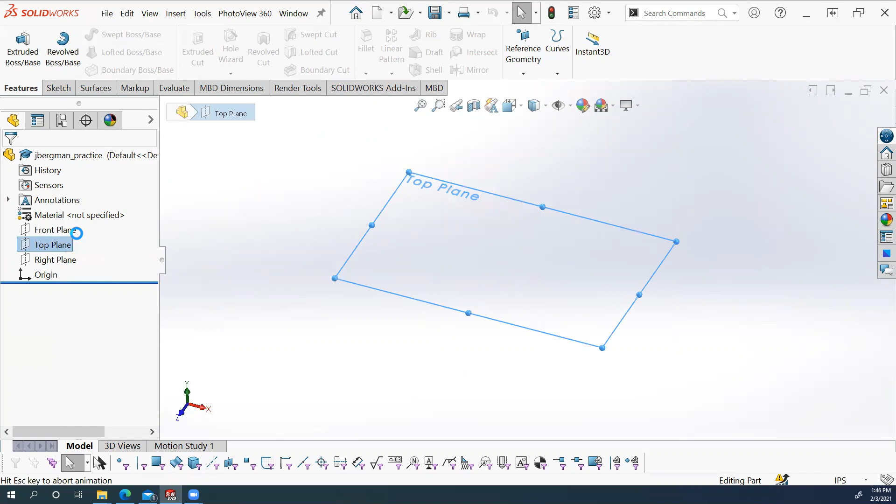So let's create our base sketch for our first profile. We're going to create a new sketch on the top plane. Click top plane, then sketch. And if your computer doesn't become normal to the top plane, you can hit Control-8 to bring your view in the graphics area to the normal view.

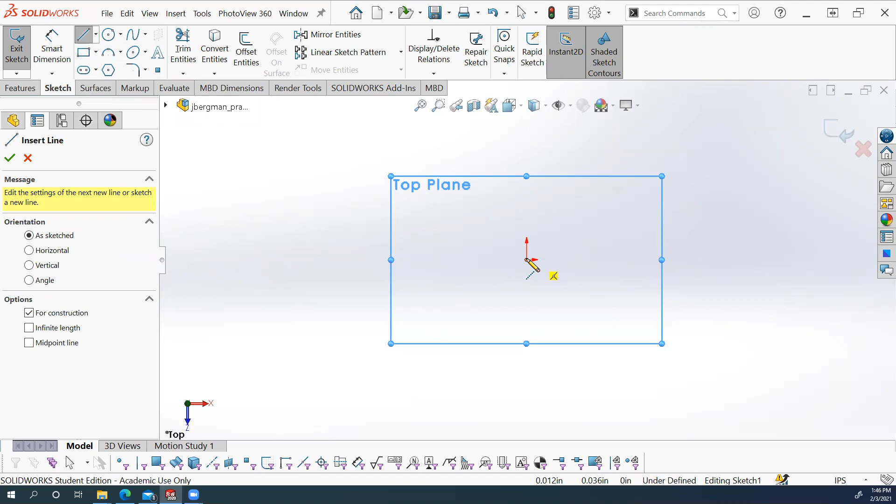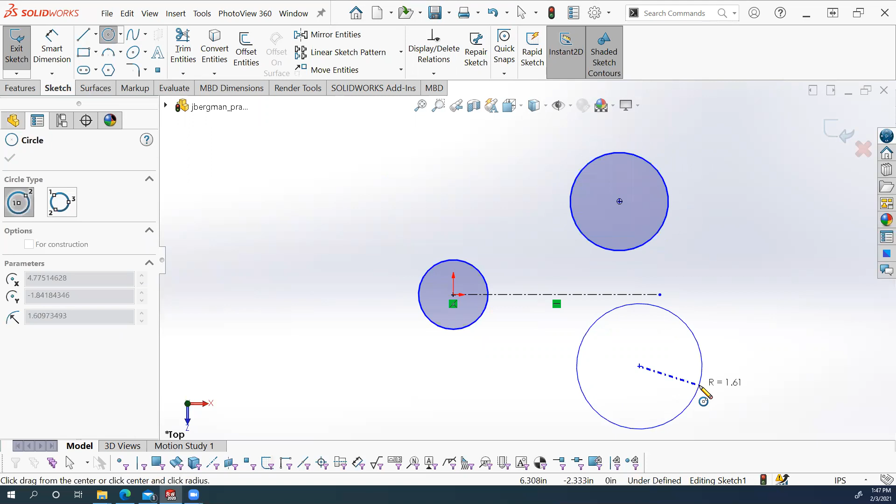Click out in the graphics area to deselect anything selected. Now I'm going to add equal relations between both sets of circles. Hold Control on your keyboard and click the 3 bigger circles and click equal, check. Then hold Control again and click the smaller circles and hit equal, check.

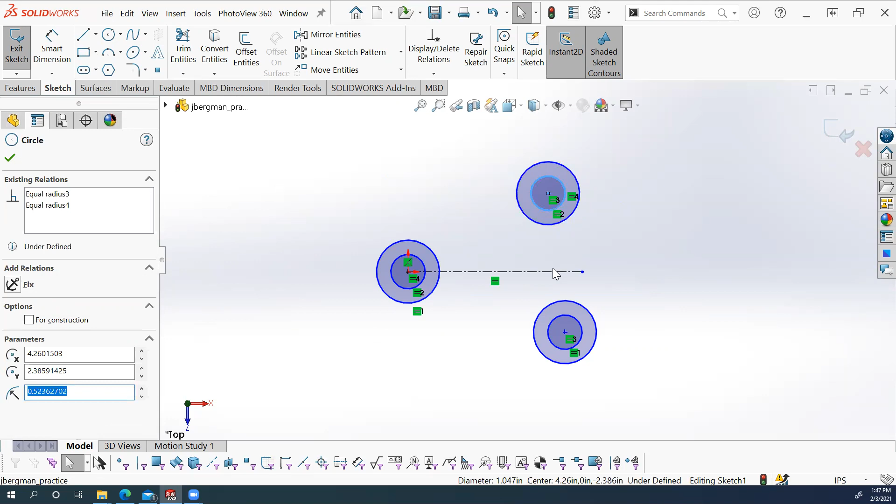Then I'm going to hold Control again and click this smaller circle, the center line, and the other smaller circle, and add a symmetric relation here, check mark. Then I'm going to hold Control one more time and click the end point of the center line and the center point of the circle, and add a vertical relation here. I notice there's also another center line I didn't add, so I'm going to click the arrow, click center line, and add that center line there.

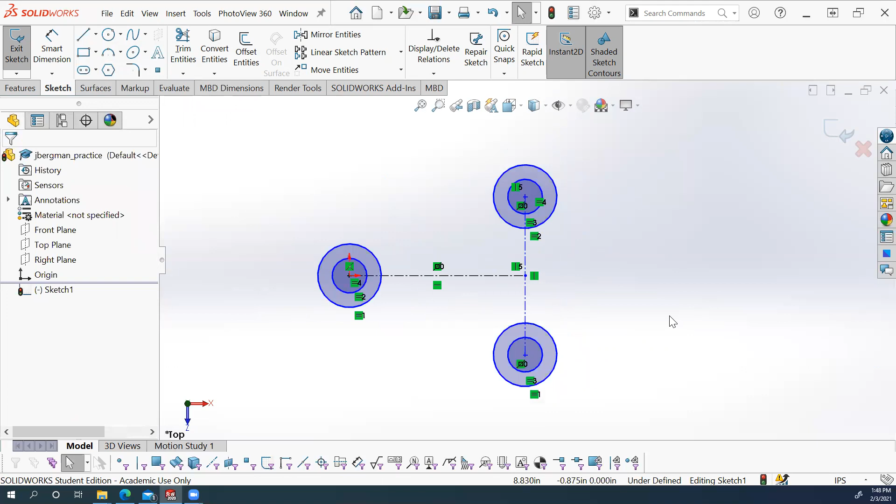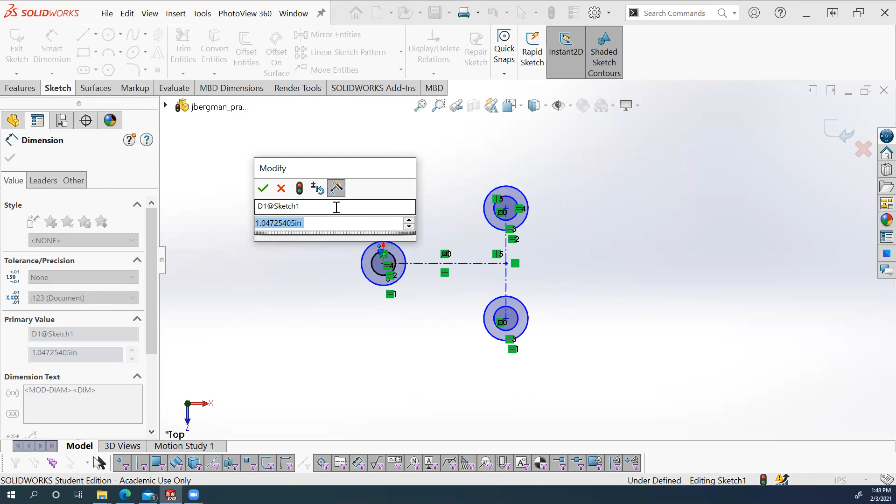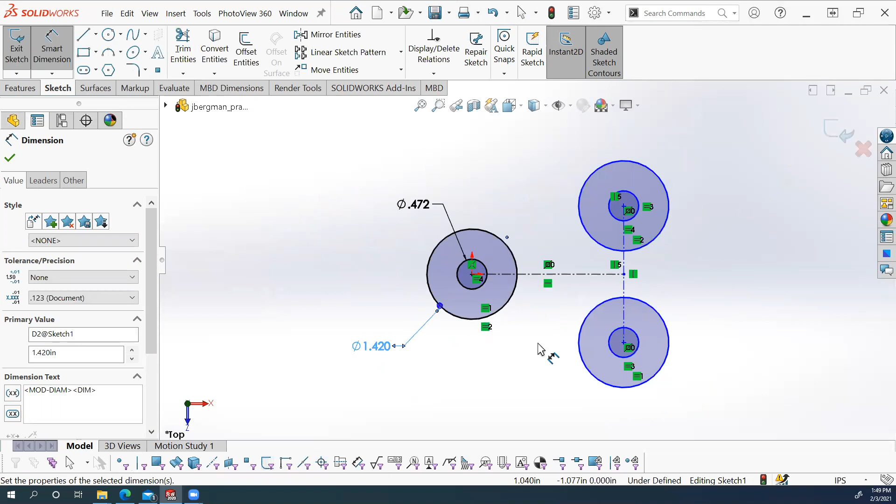Now I can go in and start adding dimensions. Click Smart Dimension. The smaller circle is going to have a diameter of 0.472, enter. The bigger circle is going to have a diameter of 1.42, enter, escape. Then we're going to add the distance from this center point to this center point, which is going to be 2, enter. And then the distance from this center point to this center point is going to be 2 as well, enter. You know you're doing everything right if you look in the status bar and see fully defined. If you don't, make sure you add all of these dimensions and relations to get fully defined. If yours says fully defined, you can move on to the next step.

So we're going to use a 3-point arc. The location of the arc is in the center here, and you click the down arrow and click 3-point arc. We're going to draw an arc - just click on the edge of this circle, then click on the edge of this circle, move your cursor in the downward direction and click. Then escape to deselect, and click in the graphics area.

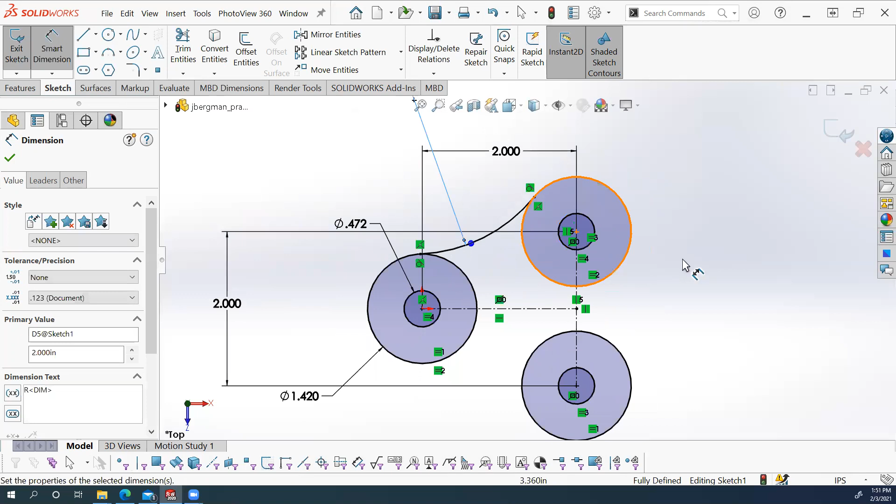Then we're going to add a tangent relation. Hold your Control button and click this arc and this circle, add the tangent relation there, check mark. Hold Control again and click this arc and this circle, add a tangent relation there, check. Then add a dimension - a radius of 2. Type in 2, enter. We're fully defined here, so we're good to move on.

Then the next step is to use the 3-point arc again. We are going to just click on this circle, click somewhere over here, then move your mouse down so the arc is in the downward direction.

Okay, and then click in your graphics area to deselect that arc. Now we're going to add a tangent relation. Hold control on your keyboard, click the arc and the circle, and select tangent, check mark.

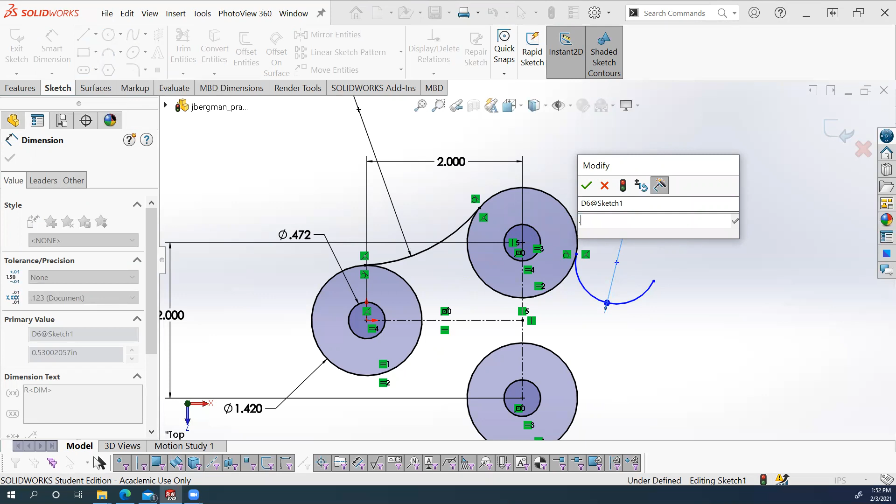Then we're going to add a smart dimension. Let's see here, 0.6, enter. Okay, awesome. And we're going to be able to fully define this once we draw this line here.

Actually we can do it now. Hold down control on your keyboard and click the endpoint of this arc and then the center point of the circle, and click vertical. Check.

Oh okay, I see here, it can move any direction up or down, so we still have to draw the line to define it.

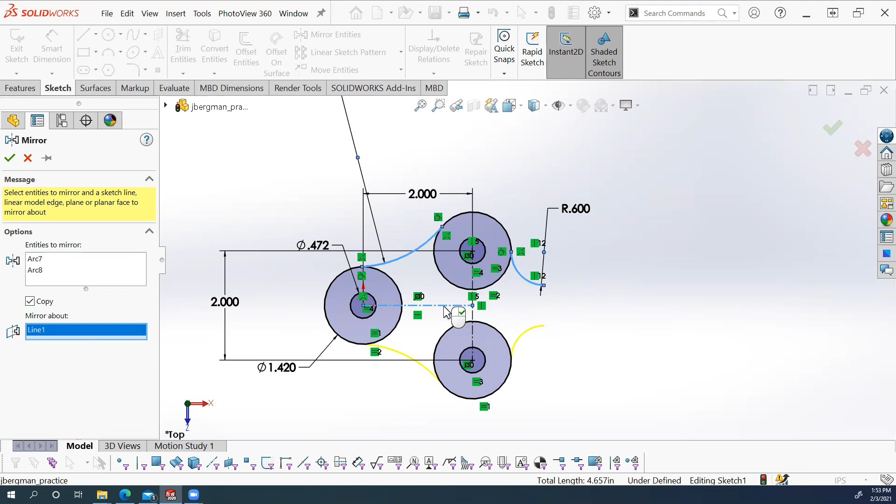The next step is to use the mirror entities command. Click mirror entities. The entities we want to mirror are this arc and this arc. Then we want to copy those about - click the mirror about section. We want to use this center line as the mirror about line. Then we're going to click check.

Then we're going to select the line command and connect the endpoints of these two arcs here. Escape, escape, and then click smart dimension. The dimension for this line is going to be 0.63, enter, escape. And that should fully define these arcs for you.

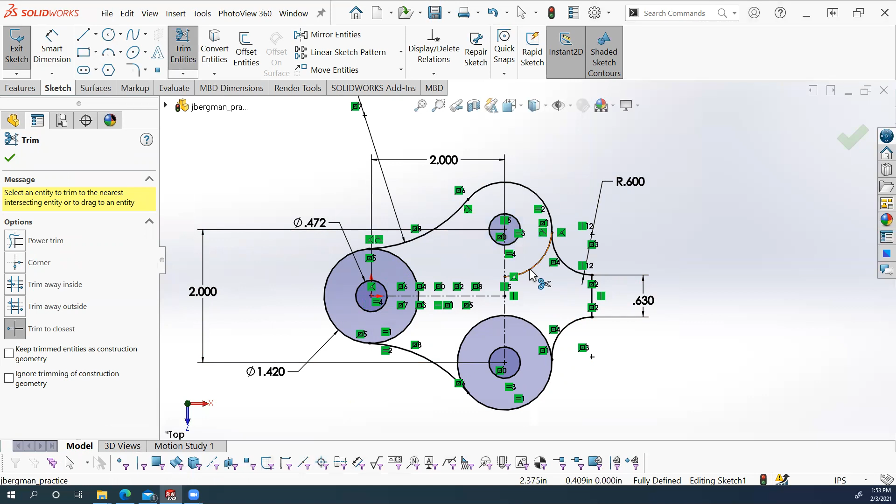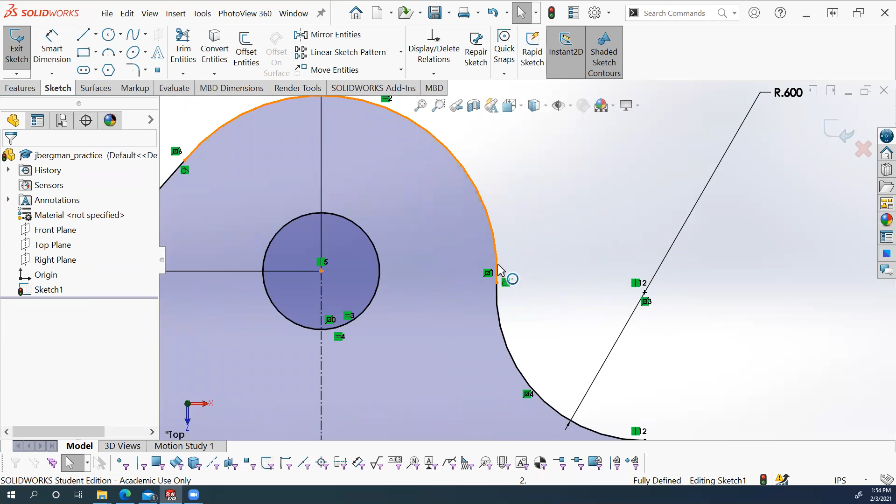Next, we're going to click trim entities, and we are going to trim the inside of these circles. If you did your trimming correctly, you should have a closed profile, and this should all be purple. If this is not purple for you, you might have some extra things you need to trim over here. Just zoom in to your sketch and see where there's openings or maybe a line that's hanging off that needs to be trimmed to make it closed.

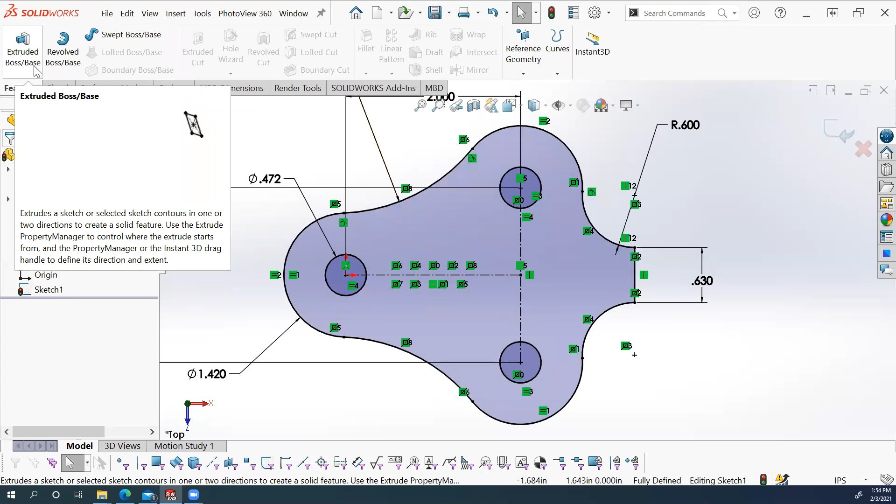All right, so now we are going to add a feature to this sketch. Click the Features tab. We're going to use Extruded Boss Base, and we're going to use the blind extrusion option.

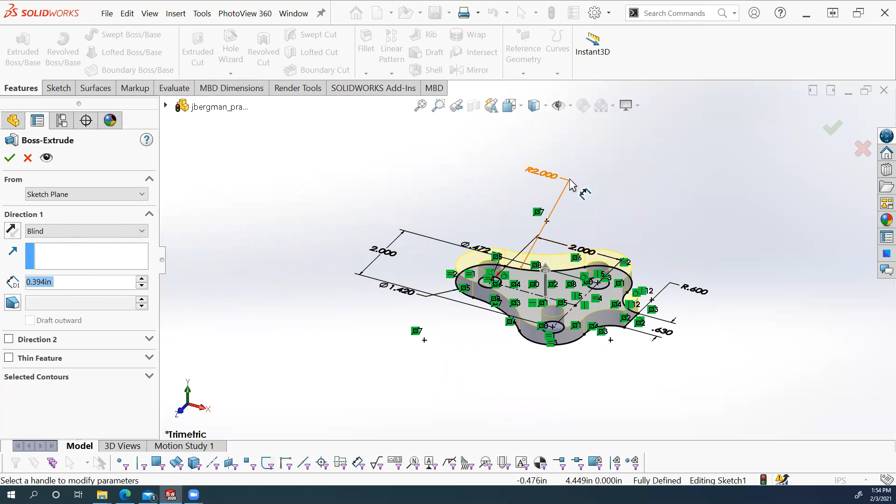And for our depth, I'm going to make the depth 0.394 inches, enter. And then make sure it's going in the upward direction. Then we're going to click check for OK.

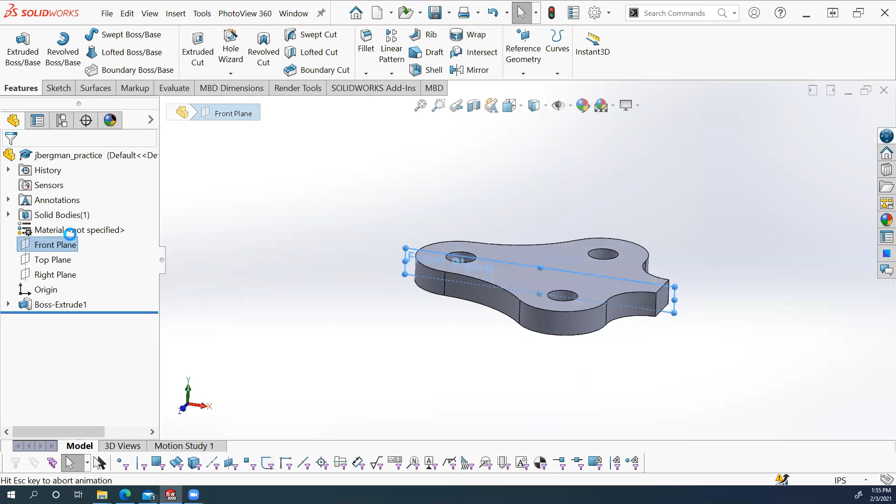Now we're going to do the second feature, or first create the base sketch for the second feature. So we're going to create a new sketch on the front plane. Click front plane and then click sketch. Then Control-8 on your keyboard if your display didn't become normal to the front plane.

All right, and then we're going to click the circle command. I'm just going to draw 2 circles just right here. Okay, then escape. All right, and now I need to make these construction circles.

So I'm just going to click on the circle, and there's 2 ways to do this. You can use this little pop-up menu and click construction geometry. If you click that, it becomes a construction circle. Or you can click this circle and then click for construction in the properties manager, check mark. That's the other way to make these construction circles.

Now we're going to add the tangent constraints or relations. Hold down Control on your keyboard and click this circle, and we want to be tangent to this face here. So we can click this line there and add the tangent relation. Check. And you can see, I'm going to rotate for you really quickly - you can see that it is actually tangent to the face here, not the line we selected.

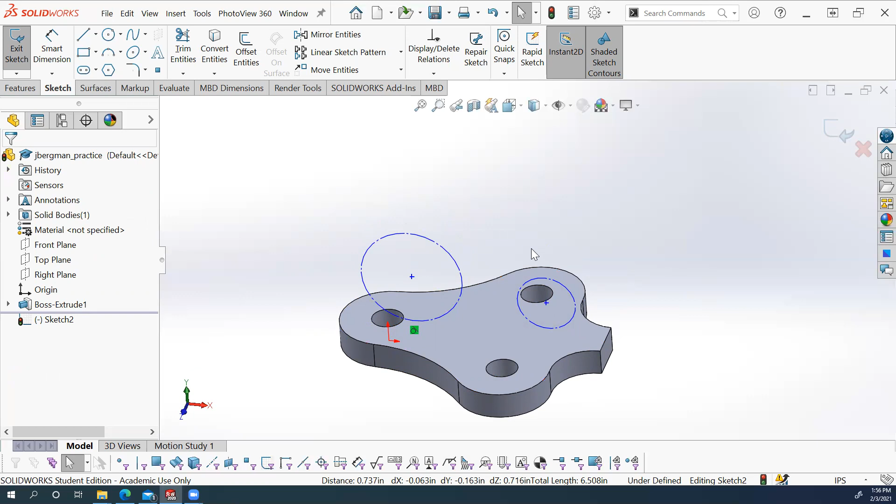Okay, then I'm going to hit Control-1 on my keyboard to make this the front view. All right, and then I'm going to hold Control again on the keyboard and click this circle, and then click this smaller circle and make these tangent as well. Check mark.

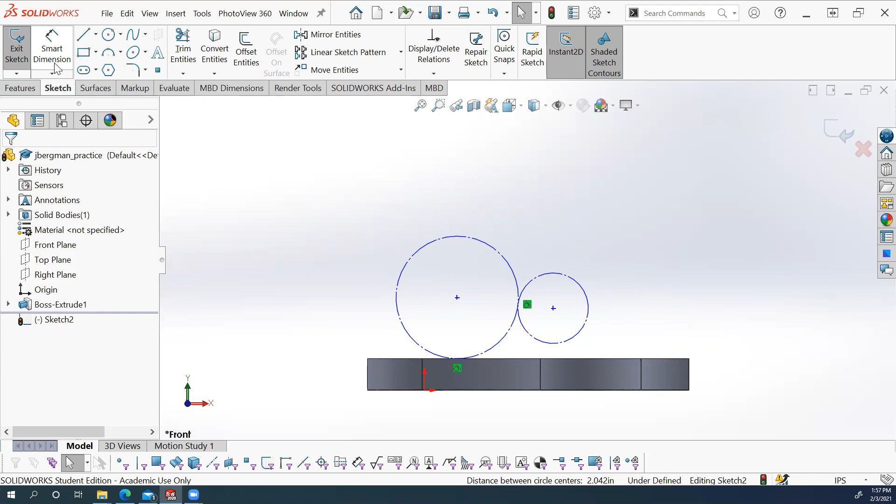All right, and then we'll add some dimensions to these. So this bigger one, click. It says it has a radius of 4.5. So the diameter, which is, you can see it says D1, which means we're entering into diameter, not a radius, or well, dimension, but dimension 1 actually.

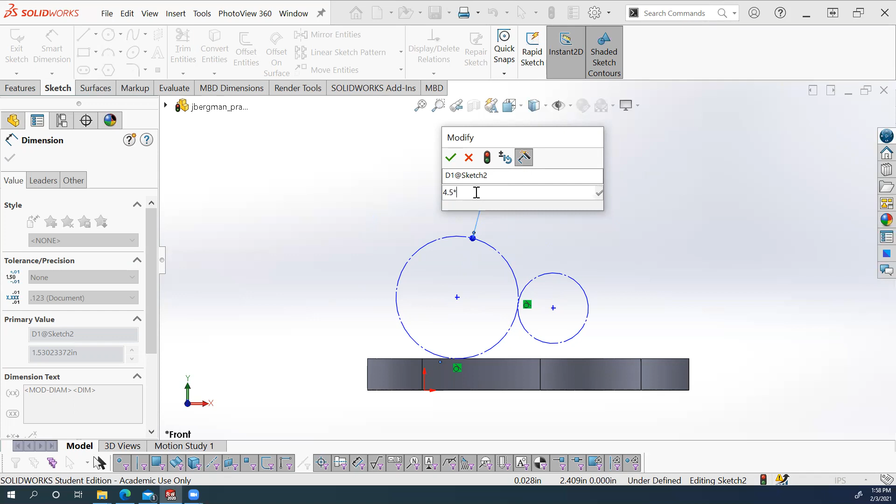But when we have a full circle, it actually will dimension as a diameter. Oh, here it is, dimension text. It says DIAM, meaning that it's a diameter. So we need to make that 4.5 times 2, because the radius is 4.5. You can use a calculator to do this, or you can just type it into the dimensions window right here. So I'm going to type in 4.5 times, which is Shift 8, 2, enter, and you can see that it dimensioned it for you at 9.

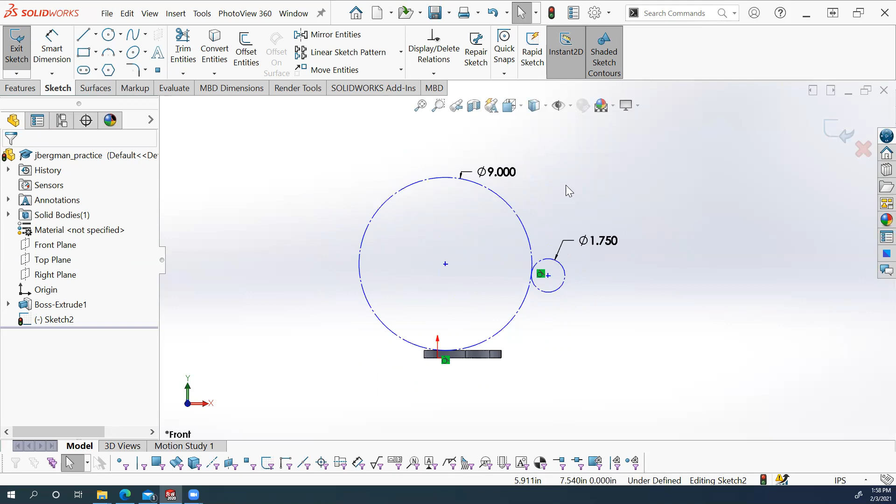And then for this smaller one, that's going to be 0.875 times 2, enter, and that is going to be diameter. All right, so let's move on. We're just going to draw normal, our circles, our geometric entities, just right on top of these circles. So click the center point of the bigger one and then draw it where it overlaps with the diameter of 9 circle. Same thing with this smaller one. Right. And now we have those 2 circles.

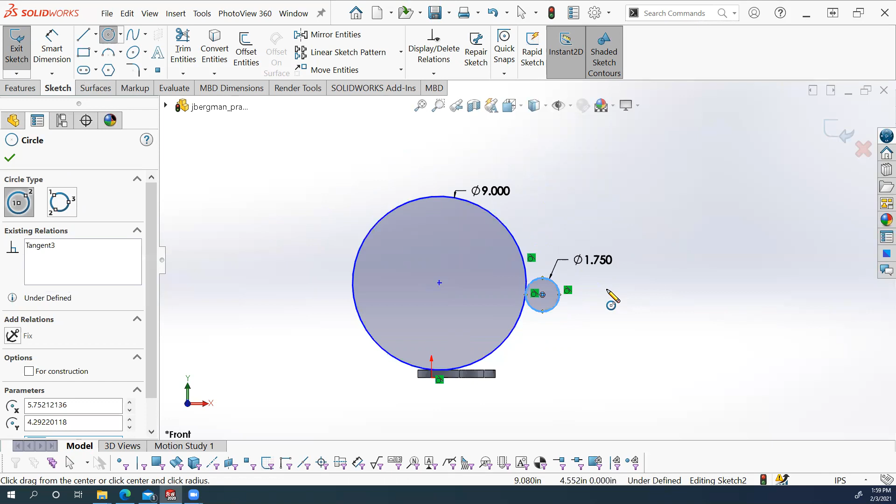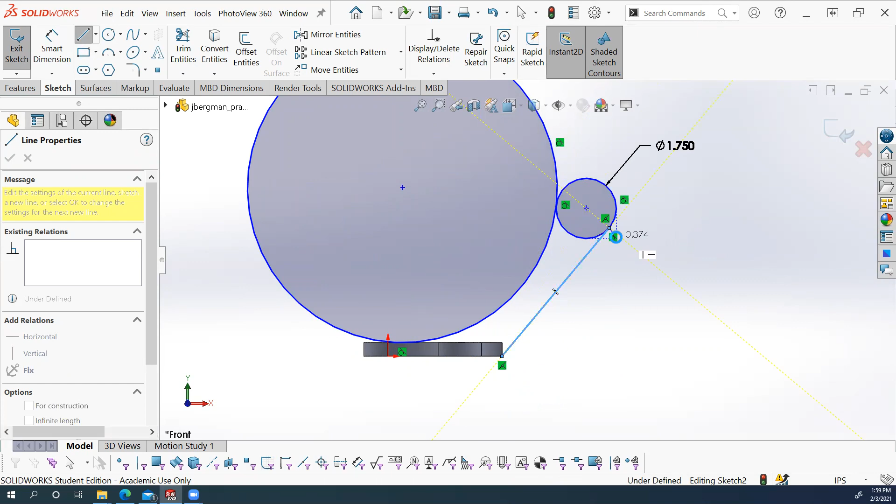Now I'm going to draw a line from, see here, I'm just going to draw a line from the end of this point to this circle here. All right, and I did it where it automatically added a tangent relation. If yours did not automatically add a tangent relation, you're gonna have to hold down Control and select these two entities, the circle and the line, and add the relation there. Okay, but mine's already added, as you can see.

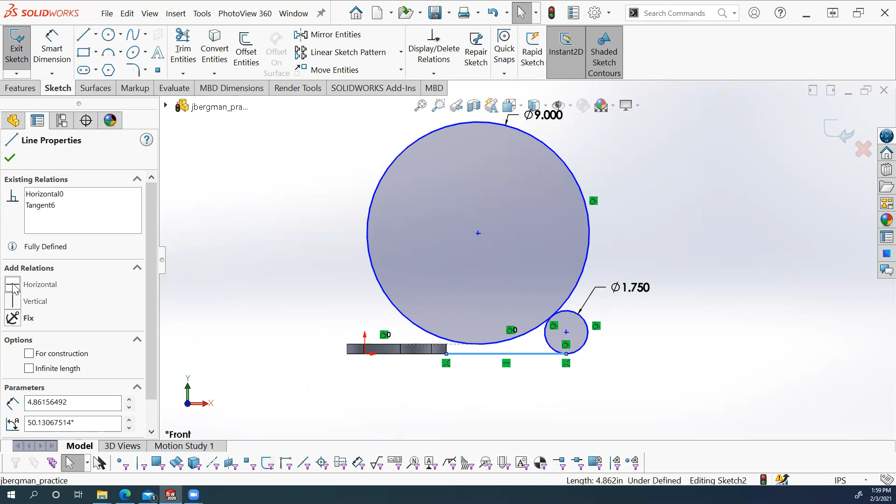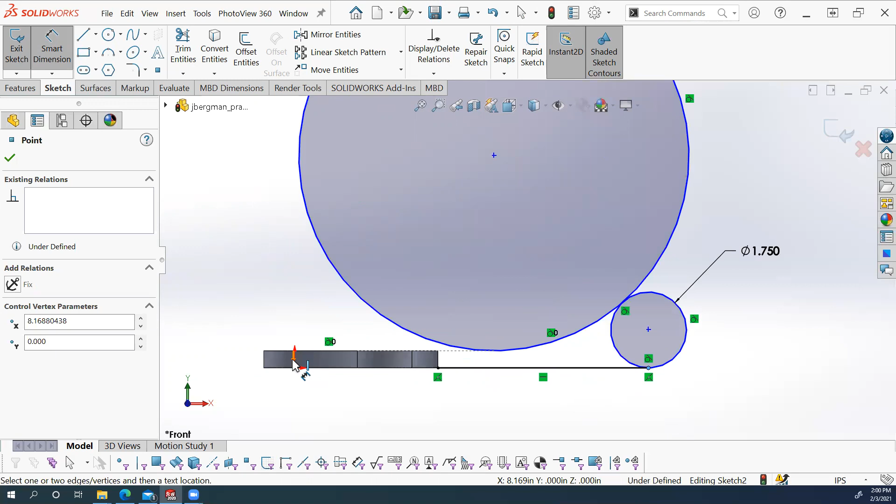Then, in order to bring this circle down, we're gonna click on this line, and where it says add relations in the properties manager, we're gonna make it horizontal there. Check. All right. And then we are going to add a distance. So smart dimension from this point to this line right here, not the origin, but this line is going to be, click, and that's going to be 4.325. Enter. All right, awesome.

And then the part that we want to extrude is actually this region here, but you can see that we do not have a closed profile right now. We need to add a line coming down and a line going to the right here so that we can connect everything and trim. So I'm going to draw a line and I'm going to hover over this edge here, and right here is the point that you see. That is going to be the tangent point. So we want it to be on that point because wherever this circle is tangent with this face is going to be the point it's touching one another. So we want to use that point.

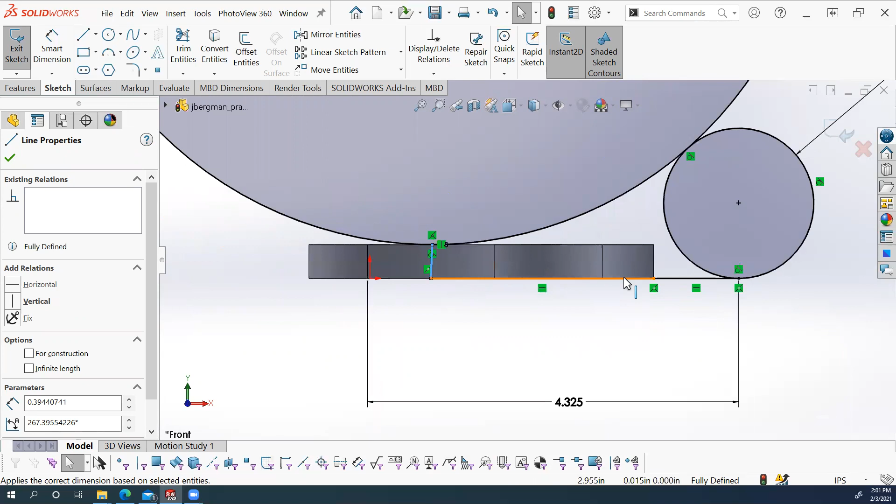So click the diamond there for the first point of the line, and then go down and click this edge for the second point. And then you can keep drawing and just connect to this line right there, escape. Okay, and I'm going to click this line and make it a vertical line. Okay, hold on a second, check. I'm going to do Control Z really quickly. Why is this? Let me delete that one. Click there, make it vertical. Okay, there's a problem here. Control Z to undo. So click that line. I'm going to delete that line really quick.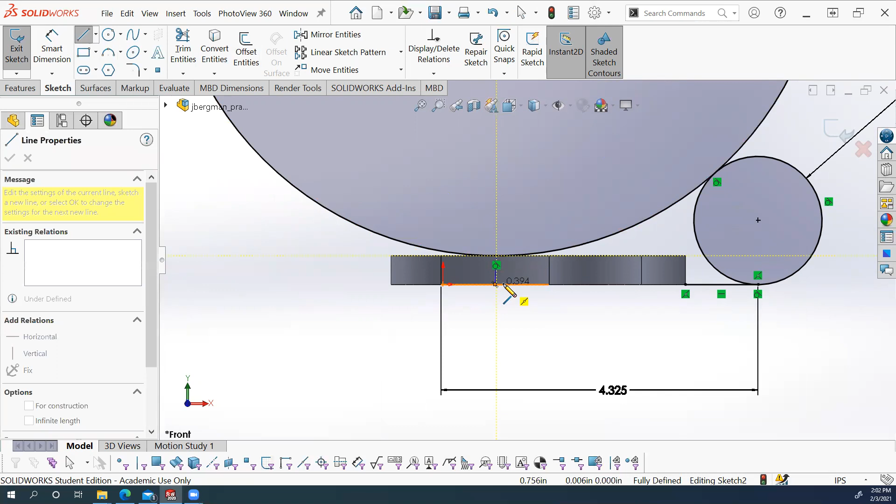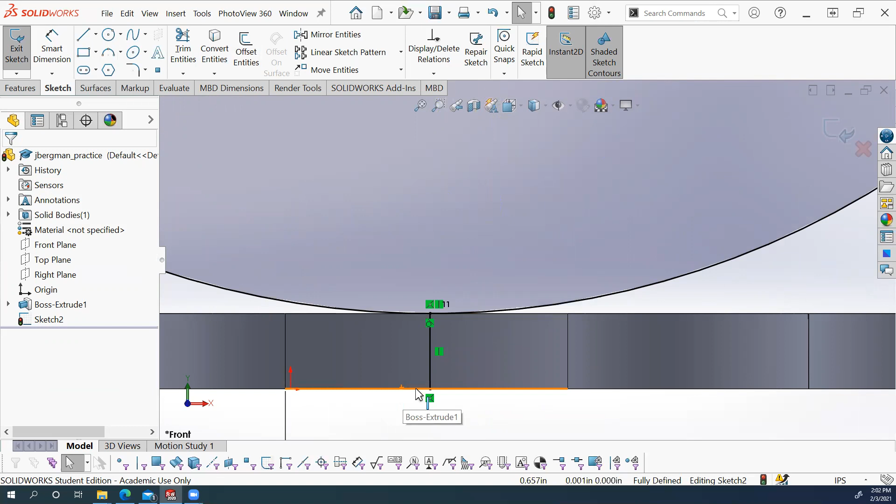And okay, click there. Oh, I see. When I brought it down, I'm just going to click, make this a diagonal line really quick, and click this point, escape, and then click the line and do vertical. Okay. Originally, I brought this endpoint down to the midpoint of this line, which is right there. And so I added that extra constraint, which is why it was diagonal. Now I'm going to click the line, click the endpoint there and there. Okay, now we're fully defined, not over defined.

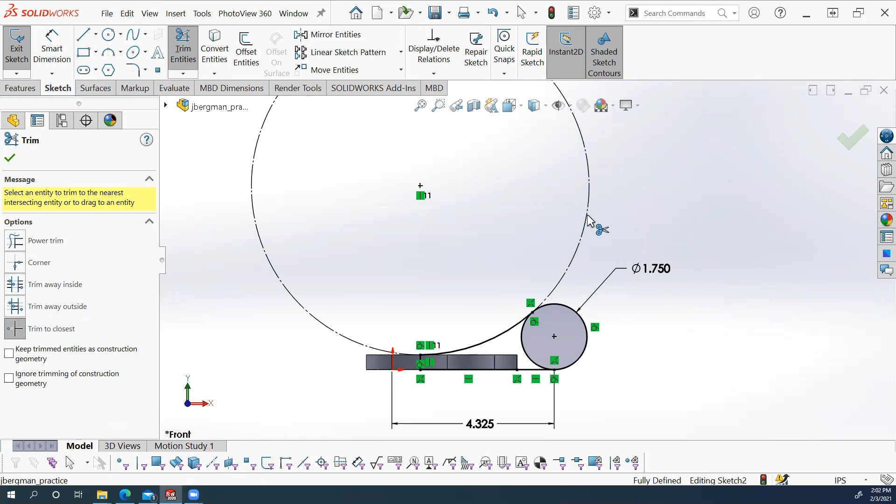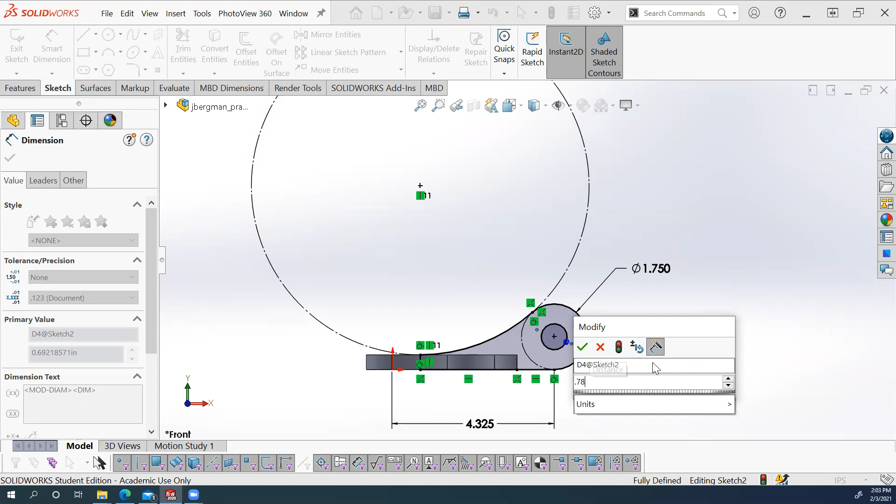Next, I'm going to click trim entities and trim this circle here, and then this circle, right? And you can see this is all purple, which is what we want. The last step is to click circle command, draw smaller circle, which is going to be the hole, and add a dimension to that, which is going to be 0.785. Enter, escape. All right, escape again. And now we have this profile.

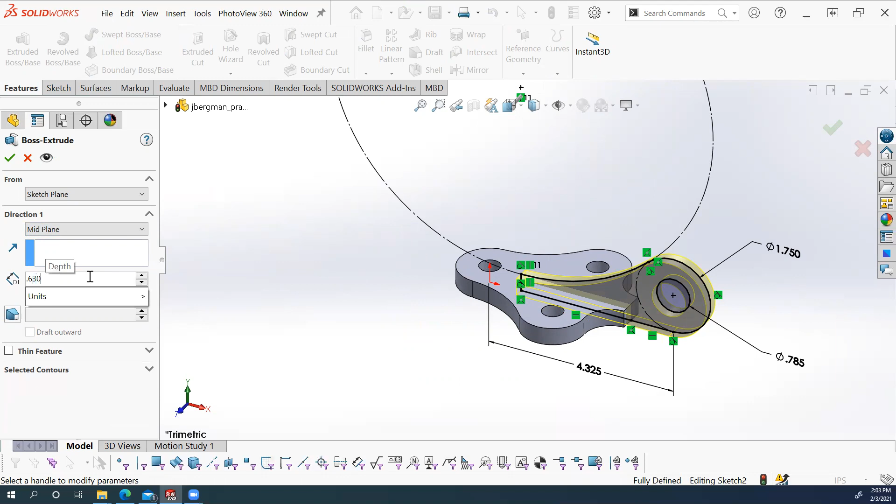We're going to go back to the Features tab and click Extruded Boss Base. We are going to use the mid-plane extrude option. And for the depth, we're going to use 0.630. Enter. And then we're going to click check. And you can hit Control-7 on your keyboard, and it will put this in the isometric view. And that is your completed part.

Make sure to save and submit this assignment in Canvas.